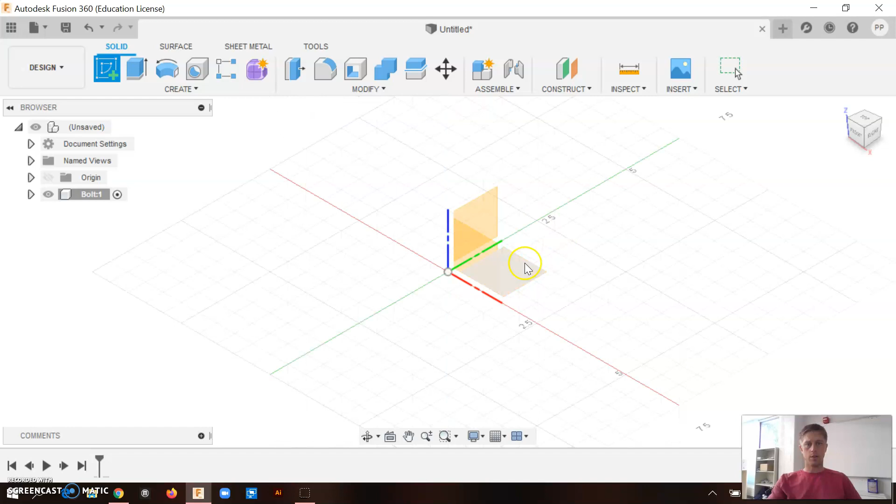Alright, now that I'm in a bolt, I'm active there. I can create a new sketch. In this case, it really doesn't matter. I always do X, Y just out of habit, but I'm going to be wild. I'm going to go YZ. I'm going to create a circle.

I'm going to do a 12 millimeter bolt, not 12 inches.

For this application, I'm going to make both the bolt and the nut, and I'm going to make them as two separate components. So it's going to be really advantageous to put this constrained to the origin. You can see it turn black. And so that's it for there.

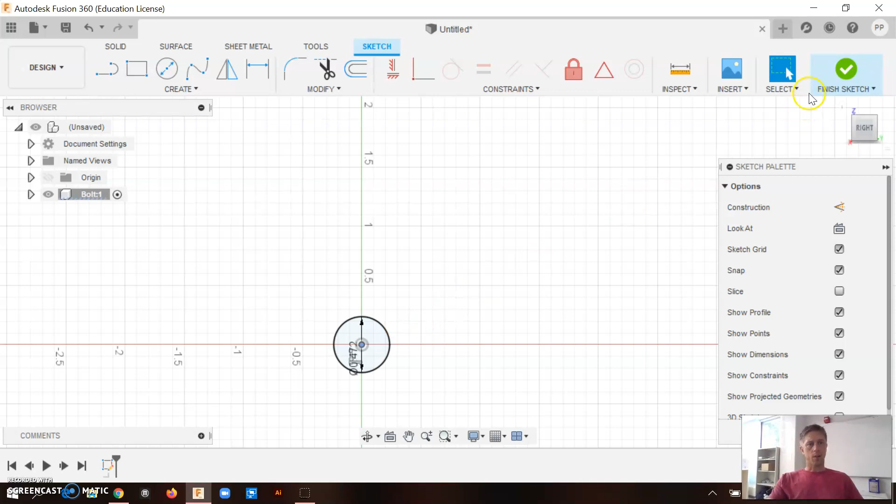Got my sketch done. Now I can extrude and pull this thing up. Let's say I want a 2-inch bolt, so this is going to be 50 millimeters, not 50 inches. I'm doing metric just to change things up a little bit.

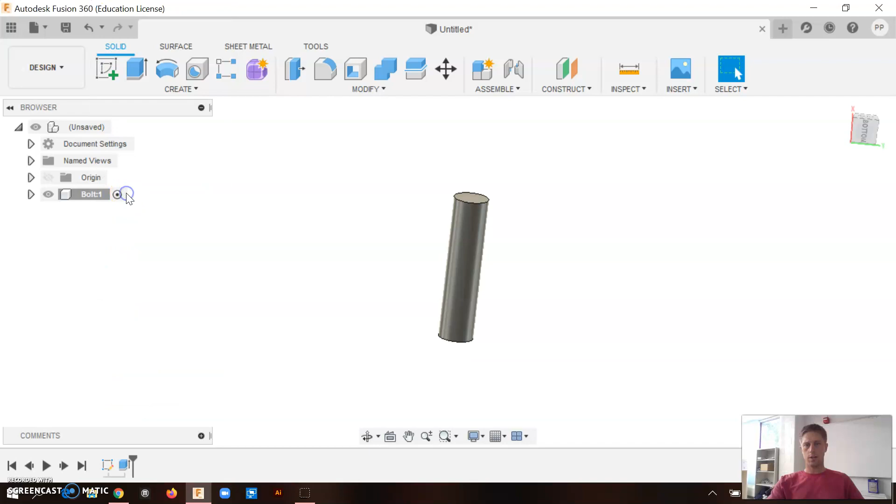Now, because I've already defined that value, I'm going to create a thread. Now when I choose a surface, obviously I don't want threads on the end, I want them on this cylinder side, and I need to make sure that it's modeled. If you don't select modeled when you export that STL or that body to 3D print it, it won't be 3D printed. So we need that modeled.

Now, because I typically do American Standard units, it's trying to resize to a 1/2 inch because that's the closest. So I'm actually going to go metric.

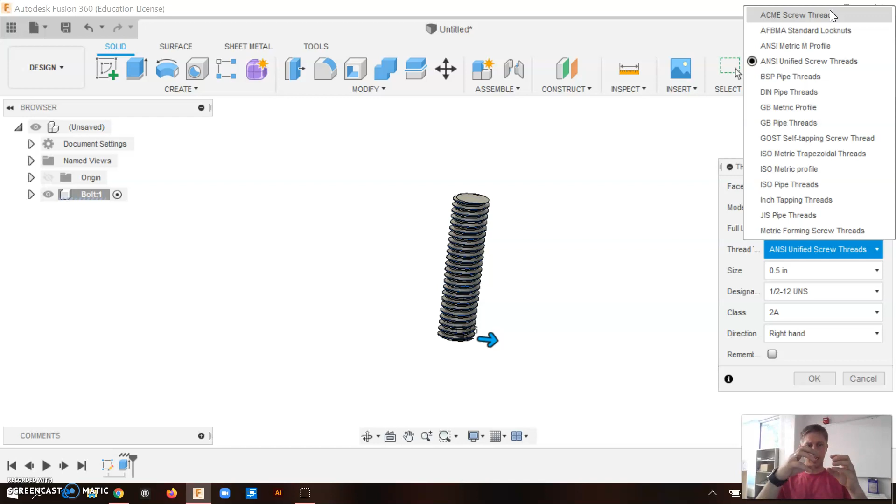So there's lots of different types of thread settings, and for almost every application you will ever want, you can do Acme screw threads, which is a trapezoidal. If you were doing something that didn't want any type of shifting, so that's common on 3D printers and the Z-axis of CNC machines, then you could do those.

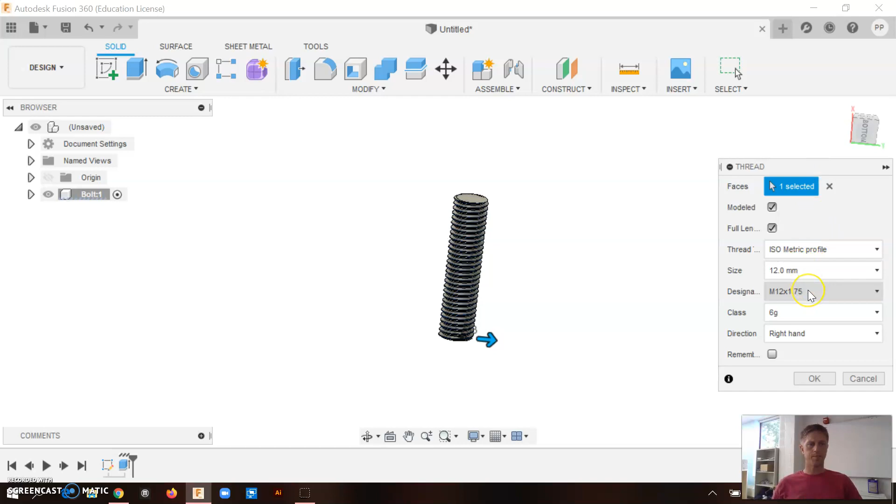And the class of tightness of tolerance, that's really tight. And if you were molding or making that or designing a component that it's important for it to be tight, then you'd want 6G. But we're going to go 4G. It's not quite as tight. And when 3D printing, since it's being 3D printed, they're not as accurate as a cast bolt. So we're going to hit OK.

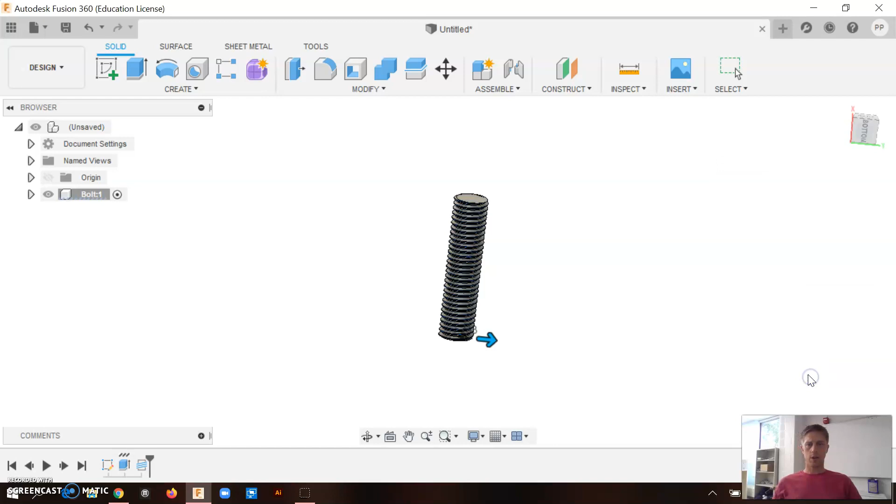And that's threads on the whole thing. Now, another thing we could do, let's say there's lots of bolts, you may or may not have seen it, is the whole thing. If we deselect and unselect the full length, we can say, oh, well, I actually only want it halfway. I only want it 25 millimeters.

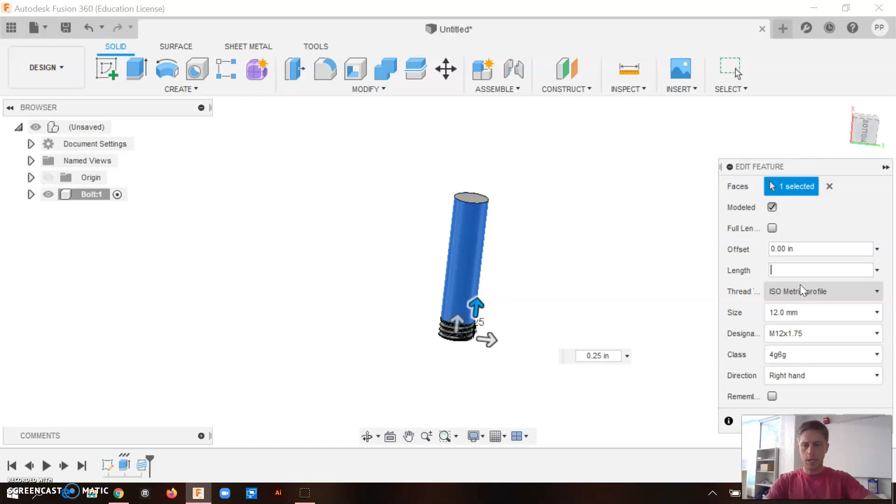25 millimeters. Okay, now it's only halfway.

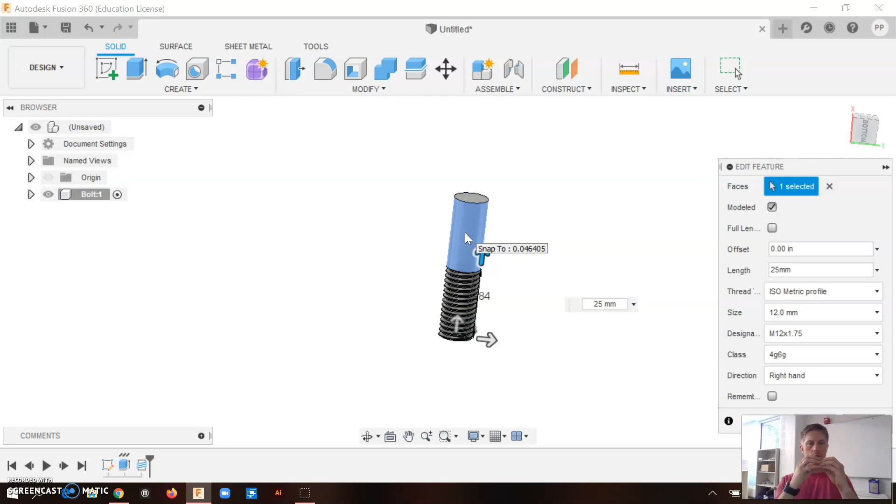And there's some applications where it's going to slide through some things, and then you want those threads, so you only want those threads on the very end. So if you want that bolt and that shaft of that bolt to be very tight in the object that it is, you don't want threads down there. You want it as strong and all of that material there. So now I can hit OK.

All right, cool. So now I'm going to do the nut. Actually, first I'm going to put a top on this. So we're going to need to be able to twist it in.

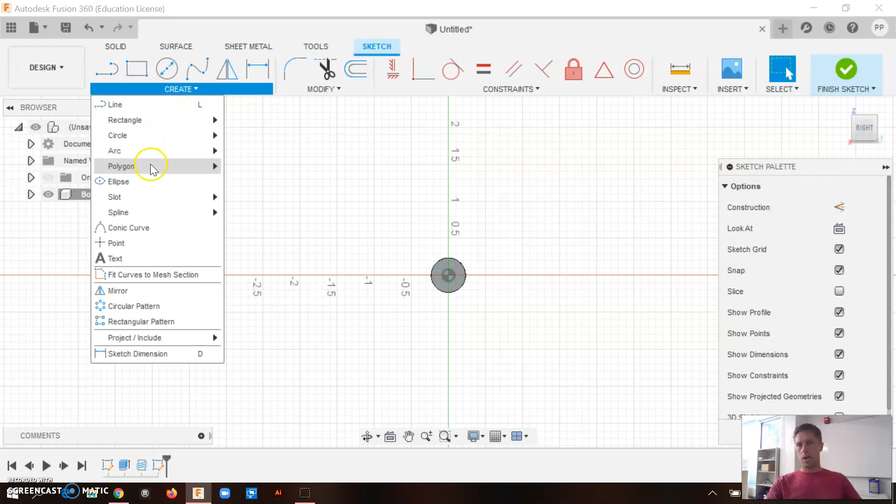Now you could actually do an Allen head, so you could actually create in the center a polygon, and you would just extrude into it, right? And then that would give you a depth and an Allen head screw. I'm going to make it look most like a bolt as possible.

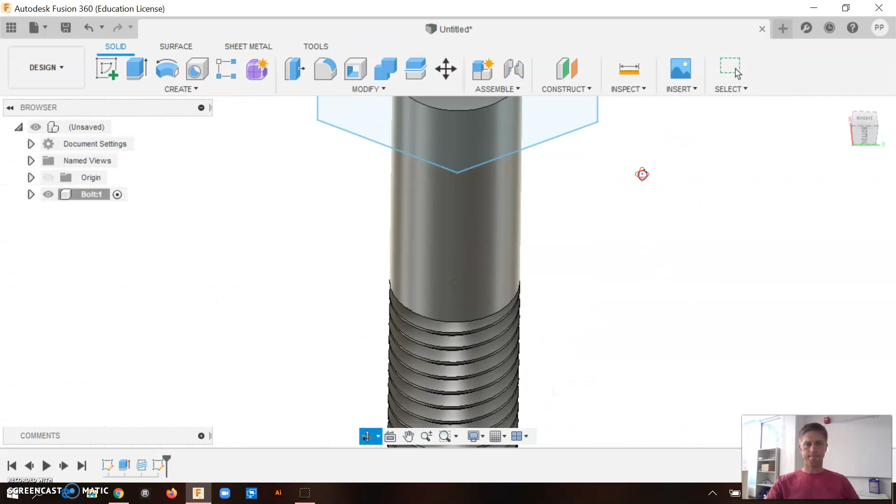Just like that. And now since I sketched on that surface, when I extrude it, I'm going to extrude all of it. I'm going to do 12 millimeters.

And I want the operation to be joined. I want those joined, I don't want them as two separate bodies, I want that whole thing. So there I got my bolt with a huge cap on the end.

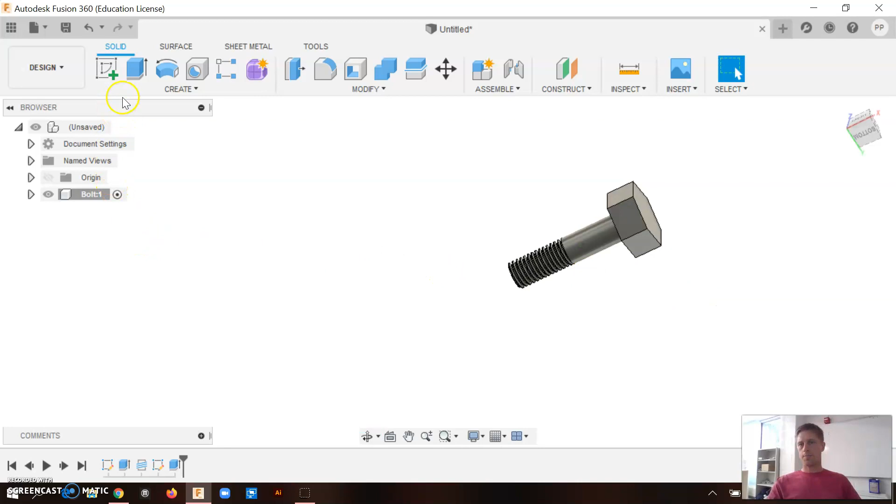Maybe a little excessive. I could go back and say, you know what, maybe I want this to be done by hand. And that's a little excessive right there. That looks a little bit better.

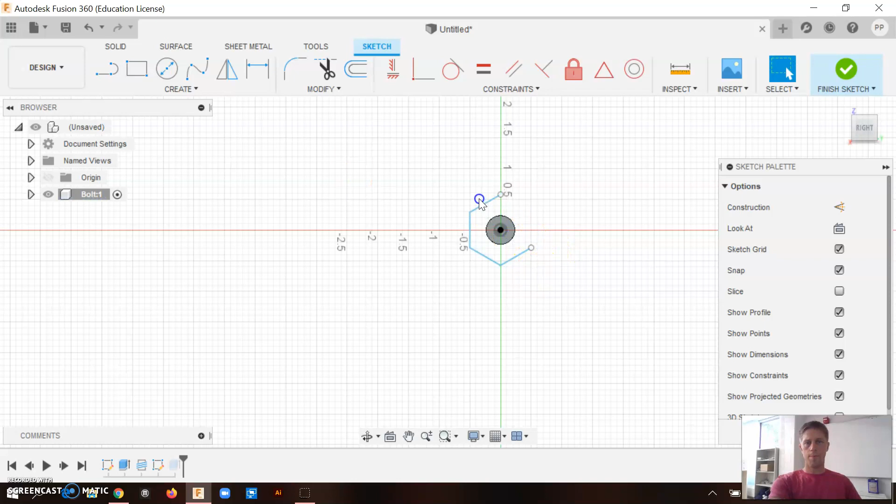And I can go back and change my sketch also. Instead of a hexagon, let's get rid of my hexagon, and I'm going to create an ellipse so that way I can just tighten it by hand. I'm going to go right to that center and say I want to be able to put some pretty good force on this, so 1.5 inches, and then I'm going to come out just past it, just like that.

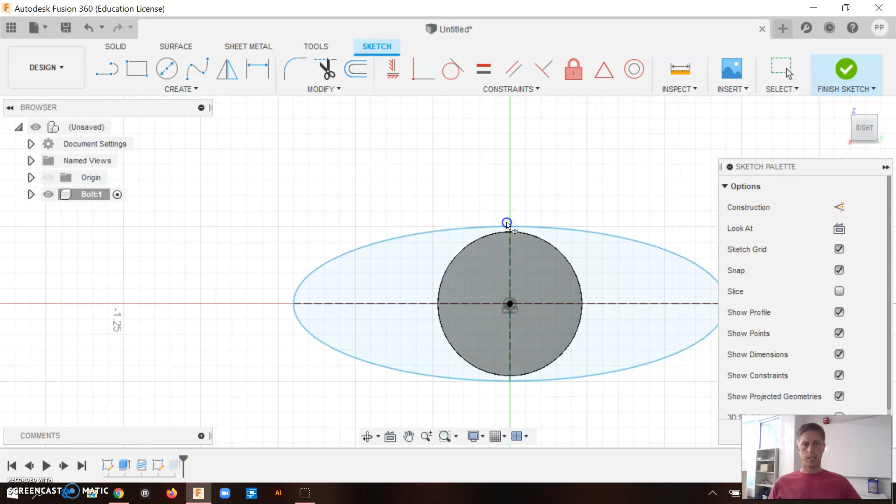And now we have to redefine what we're extruding, and then we can do all of that, and hit OK. And ta-da! All right, now we're going to quickly...

We're going to make a new component, and we're going to call this thing nut.

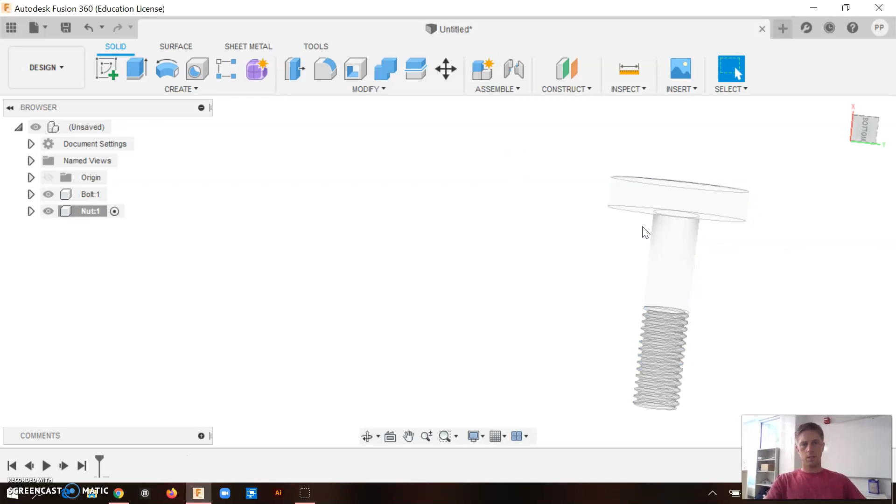Now because we planned ahead and centered this thing - and if you didn't, you can always go back to that component and drag it and constrain it to the origin - now it's going to be really easy to create a sketch on that same plane.

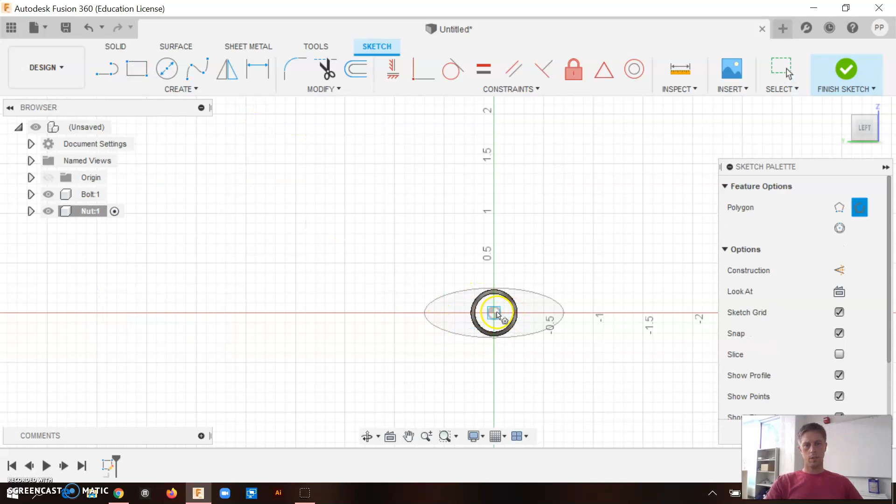That is a polygon. Go right to the middle. I don't think that was quite big enough. Let's do a polygon here.

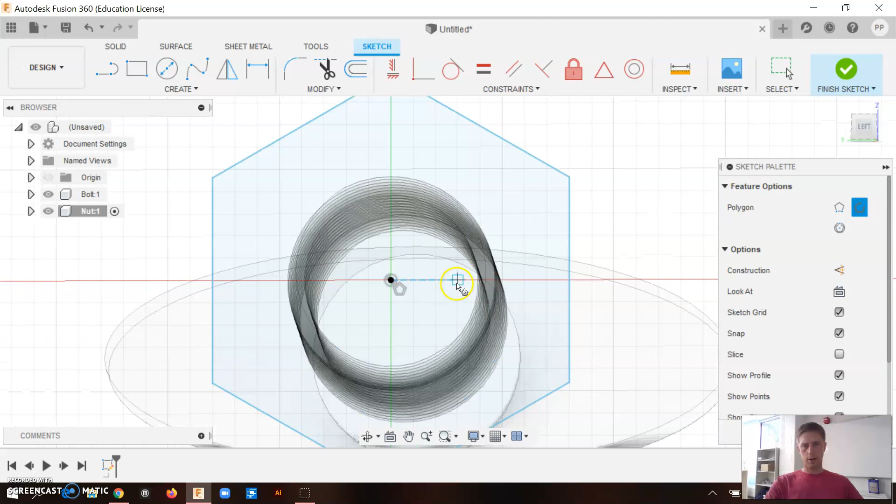There we go. Since it's 3D printed and we aren't going to print solid, it needs to be a little bit bigger. Okay, sketch is done.

Extrude. I'm going to actually extrude up into the nut. I'm going to keep it similar to that same depth, which is actually 0.3.

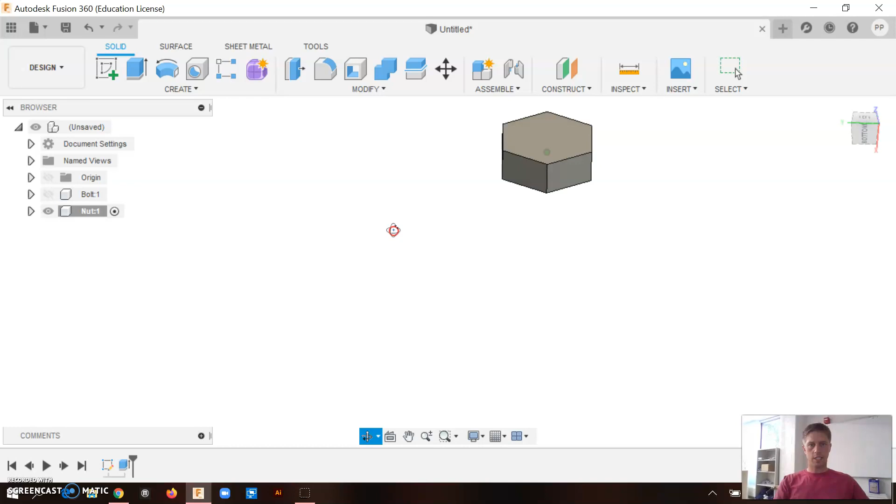Now, if you notice there, that's solid - won't work. So now we can do that awesome operation of combine. And don't forget that combine has more than one, just join operation.

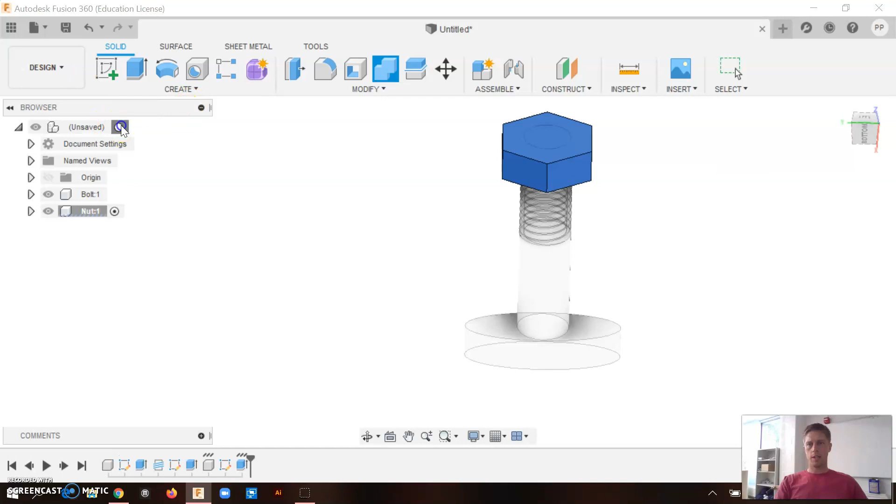So my target body, what I want to be changed, is this - and I have to go active in the whole component, sorry, so that I can click on them. So in the main settings, I have to go combine. Here's my target body, my tool body, the item with the threads, and I'm going to use that to cut.

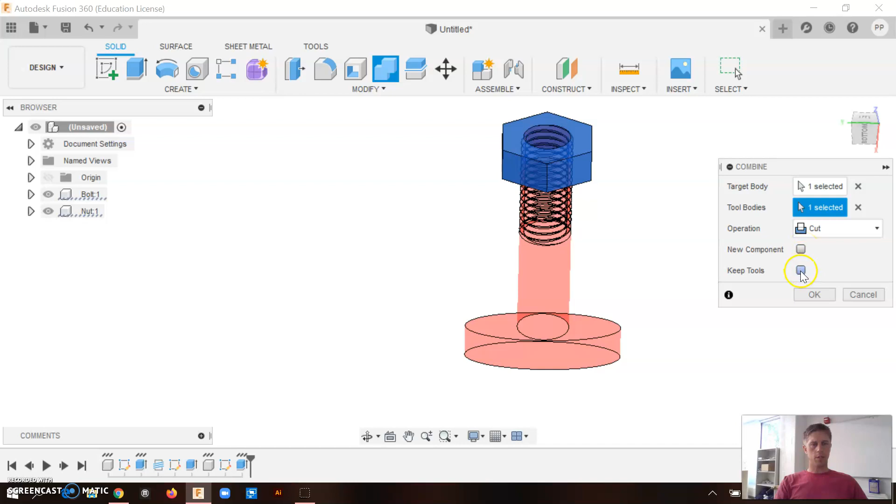And I don't want a new component, I want to keep the tool. This is going to be the tool, I don't want it to disappear, I just want it to cut the threads. So now when I hide that - ta-da, perfect little threads.

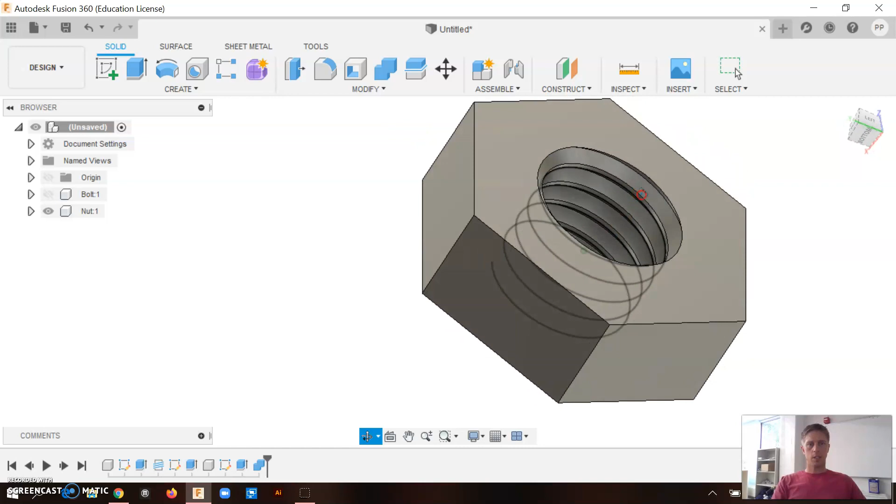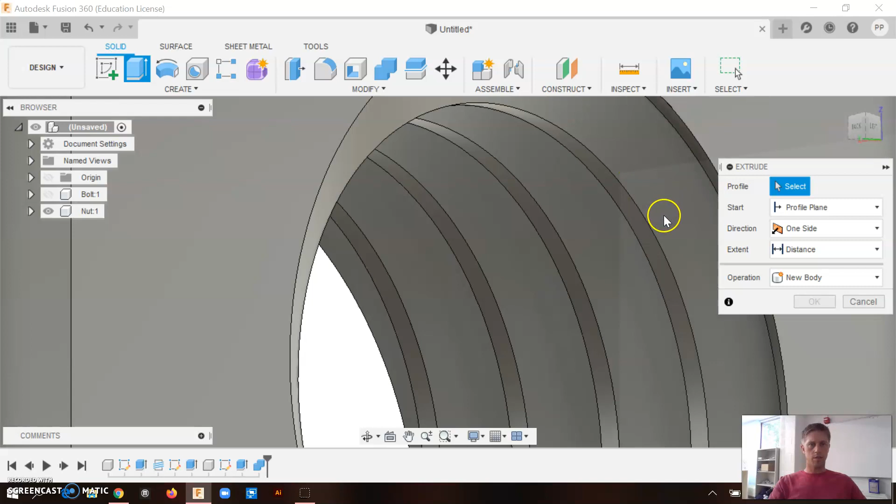So what you can actually do is extrude the surface of the threads on either one. So if we go over here, let's go active in this bolt, and I'll show you what I mean. If you make a print and you're like, not quite...

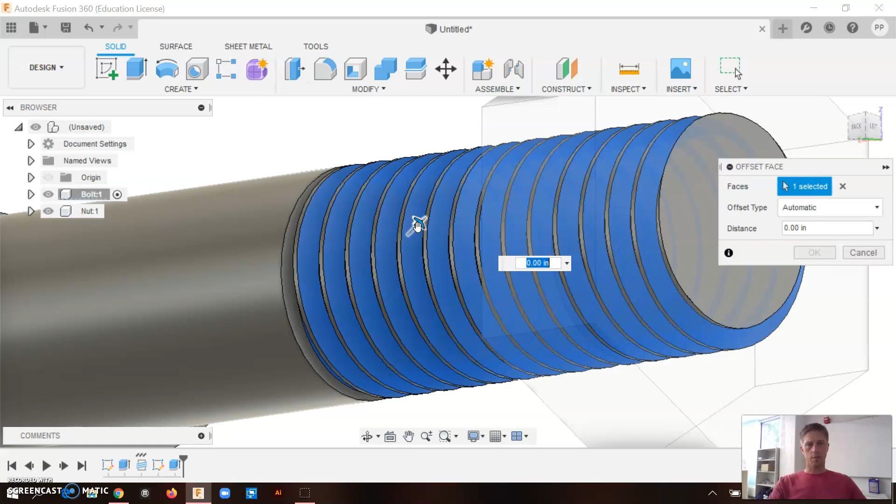Too tight, can't twist it too much. So you actually do press pull, not extrude - press pull, and I'm going to choose the thread, and you can watch them. I'm going to go negative because I'm going to pull back that value just a little bit.

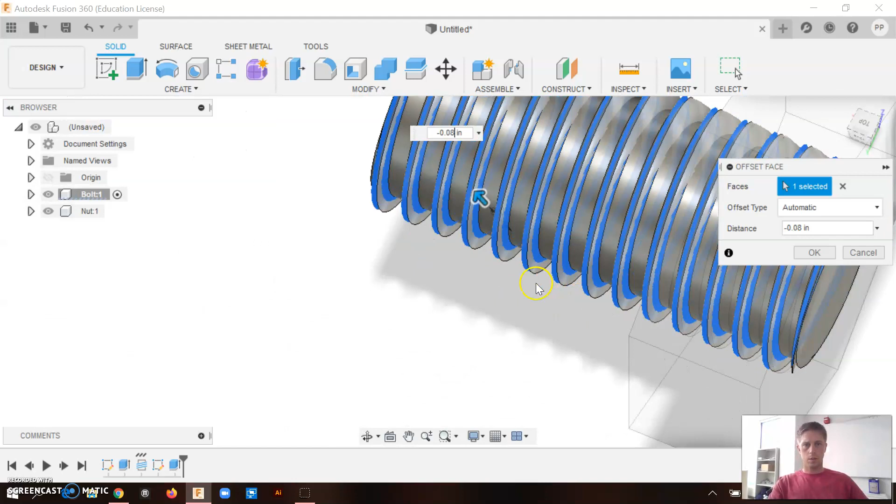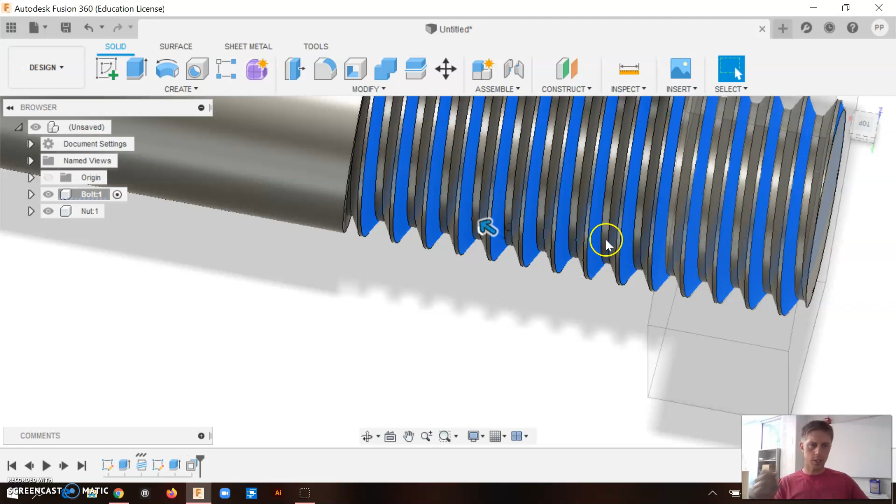Too far. Okay, and that actually might still be too much right there. So 0.02 of an inch, and then they'll thread together and it'll be a loose fit - or it will be super tight. That all depends on the 3D printer.

All right, there you go. Threads.